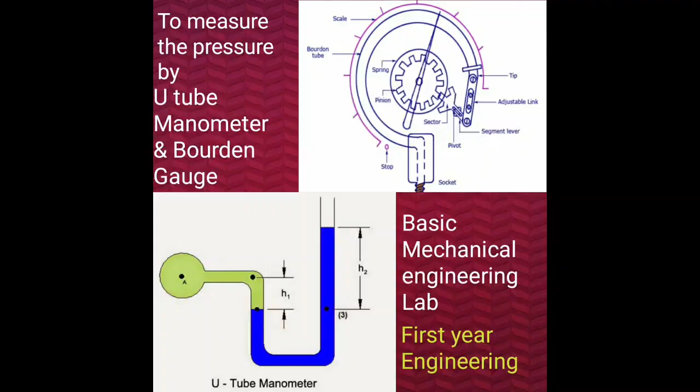In this session we are going to perform the experiment to measure the pressure by means of the U-tube manometer as well as the Bourdon tube pressure gauge. So, the aim of the experiment is to find out the pressure of water developing from a pump using a Bourdon tube pressure gauge and a differential manometer.

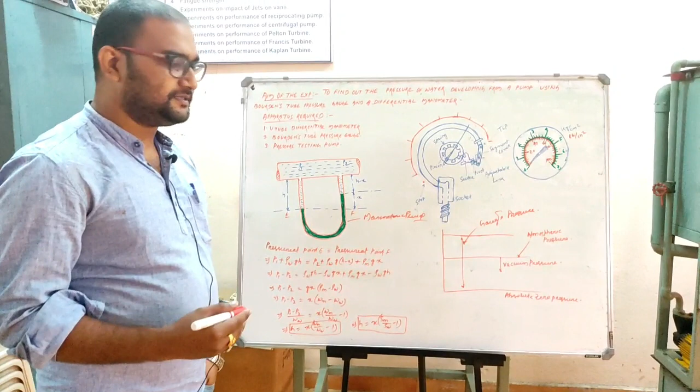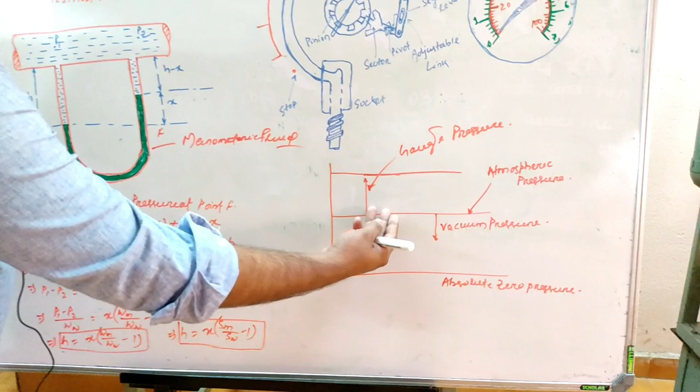Whenever we measure pressure, it is measured with respect to a certain reference point, and that reference point is absolute zero pressure. And when it is the atmospheric pressure, the pressure below the atmospheric pressure is the vacuum pressure, and all the pressure above the atmospheric pressure is known as the gauge pressure.

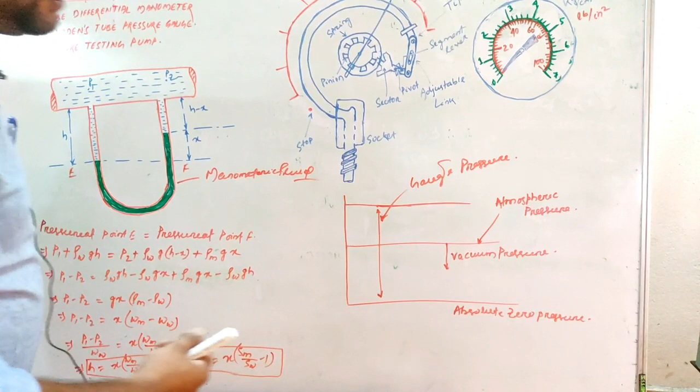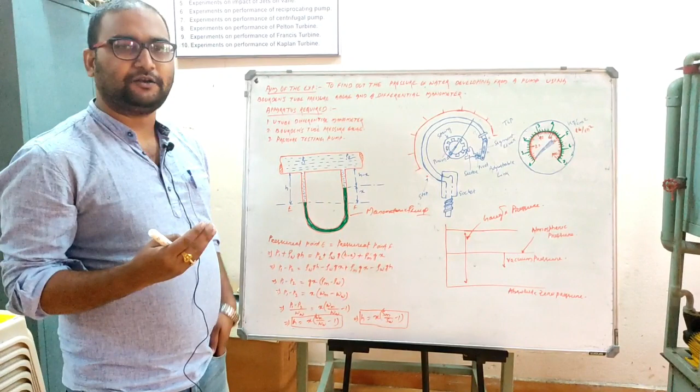Pressure measuring devices are mainly of two types: manometers and mechanical gauges. In manometers we find the U-tube manometer, the piezometer, the U-tube differential manometer, and so on. In mechanical gauges we mainly find Bourdon tube pressure gauges and diaphragm pressure gauges.

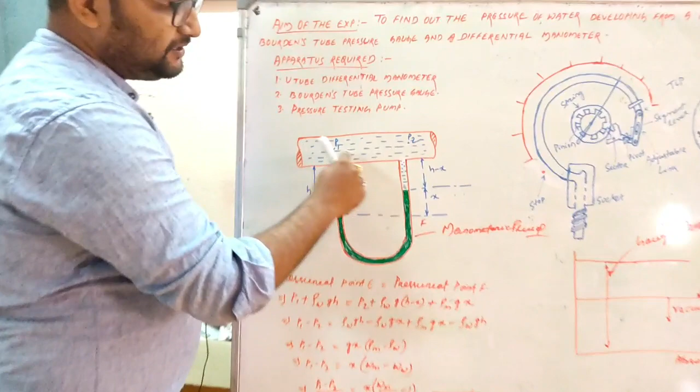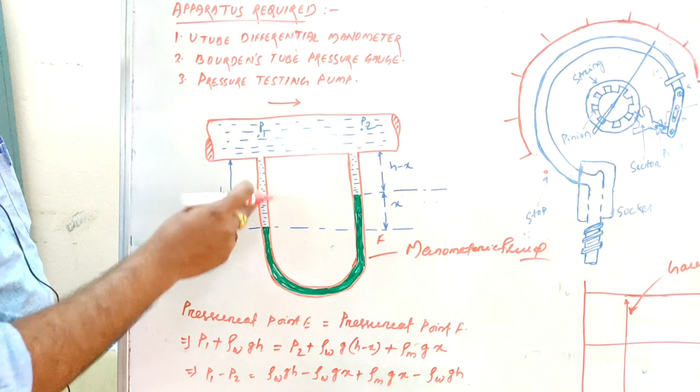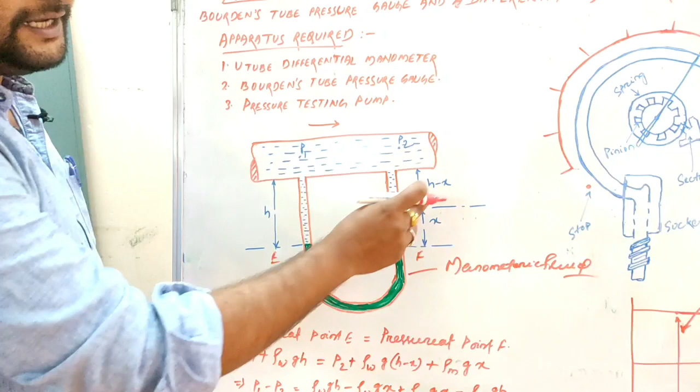In the U-tube manometer there is the main pipe for which we are measuring the pressure, in which the water is flowing from point P1 to point P2, and we measure the pressure difference between P1 and P2. The limbs of the U-tube manometer are connected, and inside is the manometric fluid. The height difference between the levels of manometric fluid is x, the head difference is h, and h minus x is the height between the measured point and the manometric fluid.

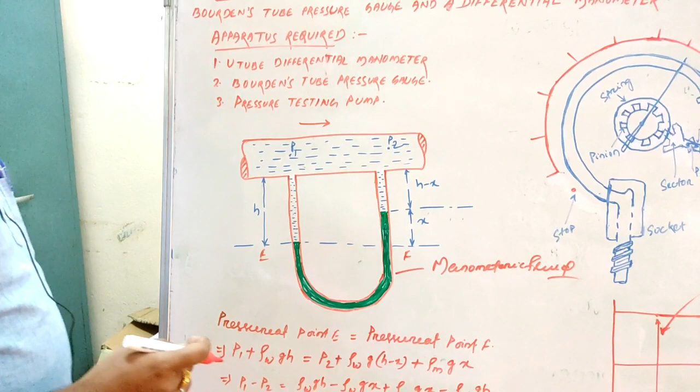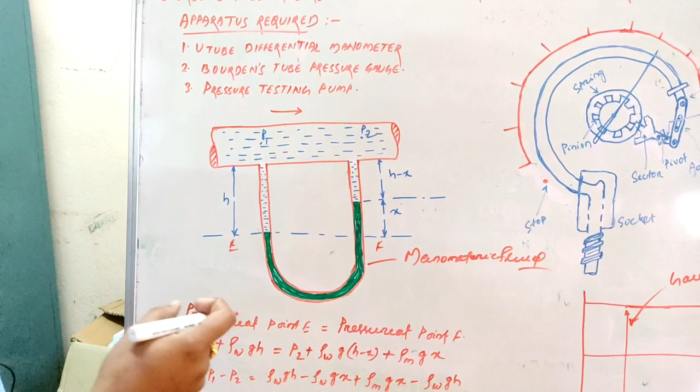For the manometer, the law of pressure measurement is the hydrostatic law of pressure. When the fluid is at rest, that means static condition, at any horizontal line the pressure is the same. Here the horizontal line is EF, so the pressure at point E equals the pressure at point F.

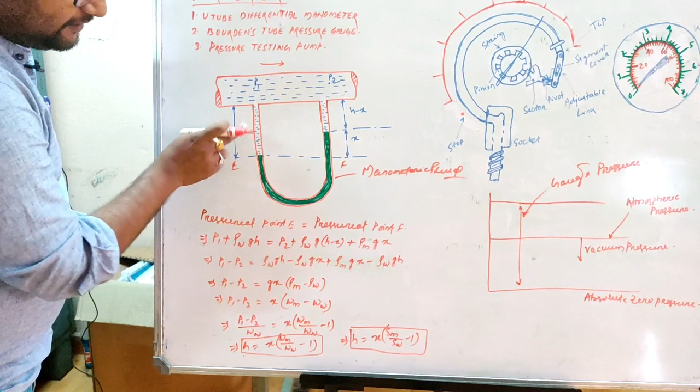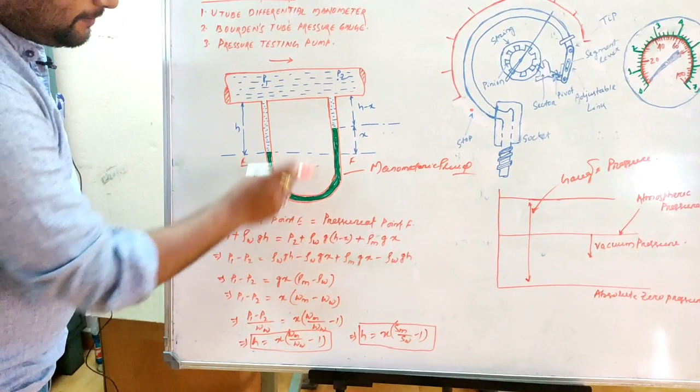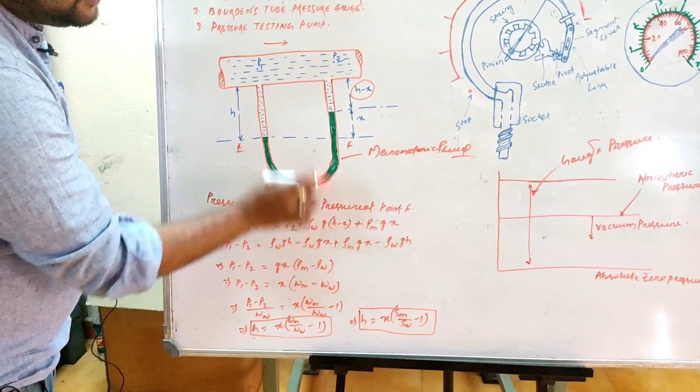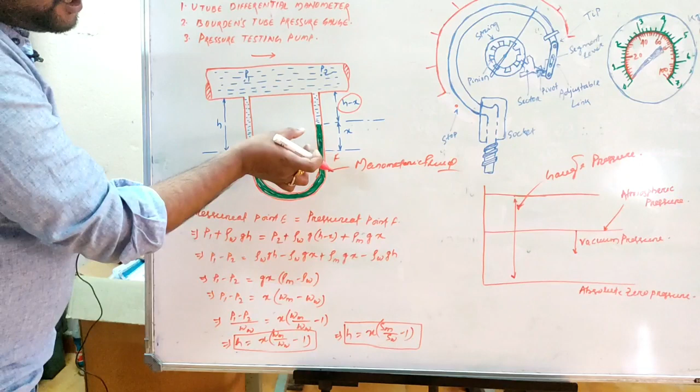Equating them, the pressure at point E is P1 plus rho of water into g into h, h being the height of the water inside the limb. This equals P2, the right side pressure, plus rho of water into g into (h minus x), because h minus x is the height here, plus the manometric fluid height. Let us consider the manometric fluid may be Hg. So here it is rho of m into g into x.

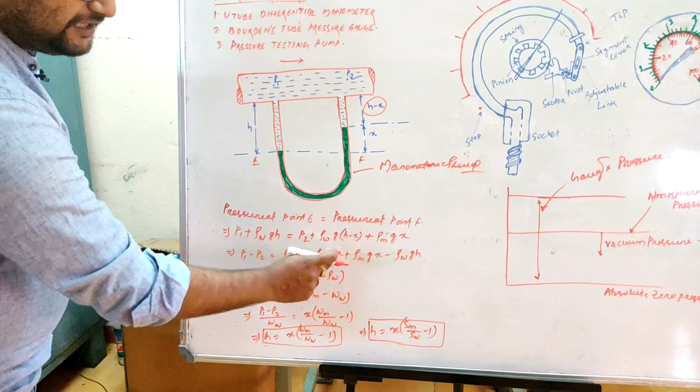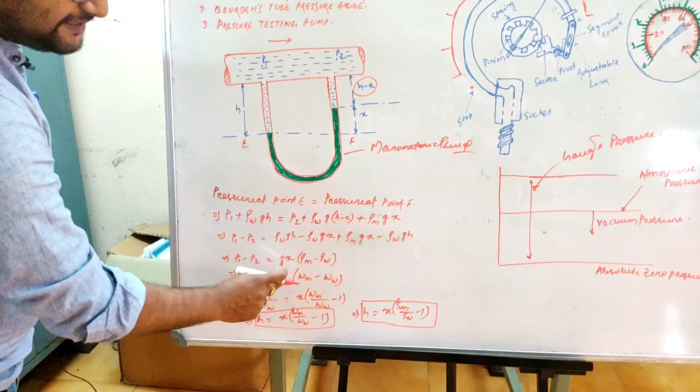We want the pressure difference between P1 and P2. So P1 minus P2 equals rho of water into gh minus rho of water into gx plus rho of m into gx minus rho of water into gh. So P1 minus P2 equals x into (Wm minus Ww).

Wm is the specific weight of the manometric fluid and Ww is the specific weight of the water. Dividing both sides by Ww, P1 minus P2 divided by the specific weight of water equals x into (specific weight of manometric fluid divided by specific weight of water minus 1).

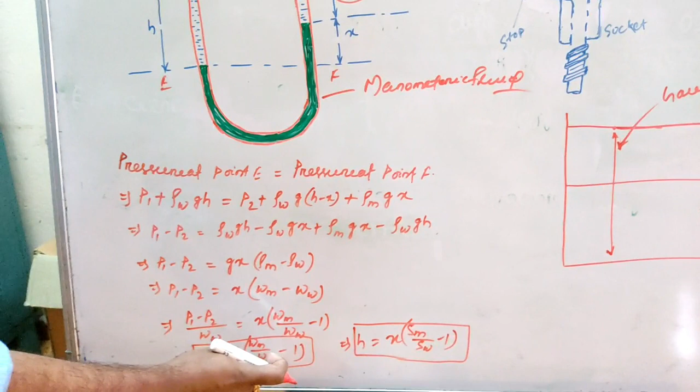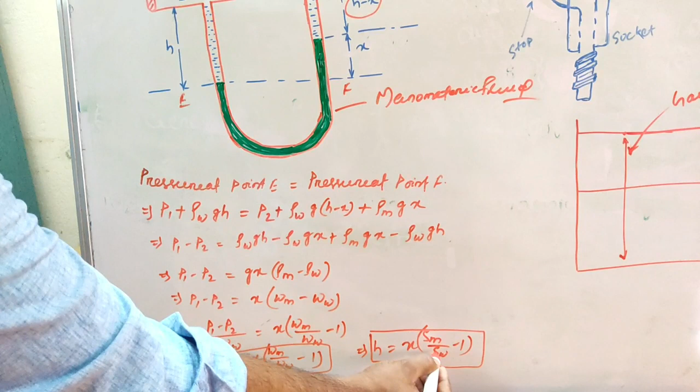This implies h, the water head, equals x into (specific weight of manometric fluid divided by specific weight of water minus 1). The ratio of specific weights is the same as the ratio of the specific gravity of the manometric fluid to the specific gravity of water. So I can write h = x(Sm/Sw - 1).

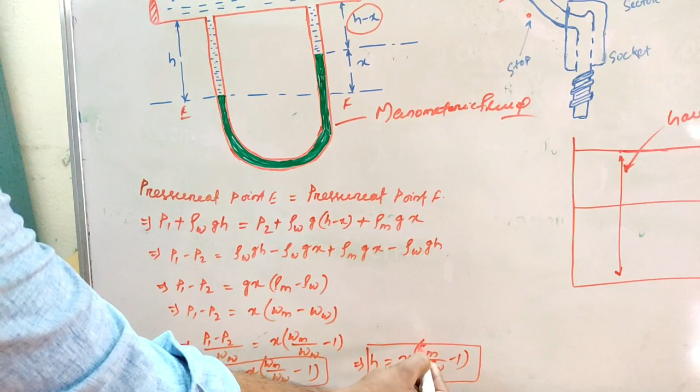If the manometric fluid is mercury (Hg), then Sm value will be equal to 13.6, and if the fluid is water, then Sw will be 1.

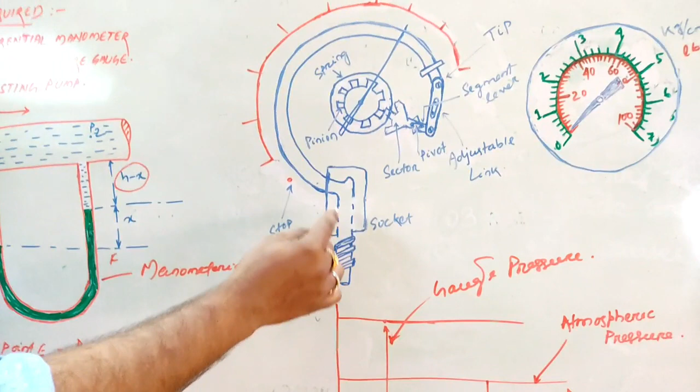Now moving to the Bourdon tube pressure gauge. Here we can see the socket, and the water is going to enter through this one, and here we can see the curved tube is attached here.

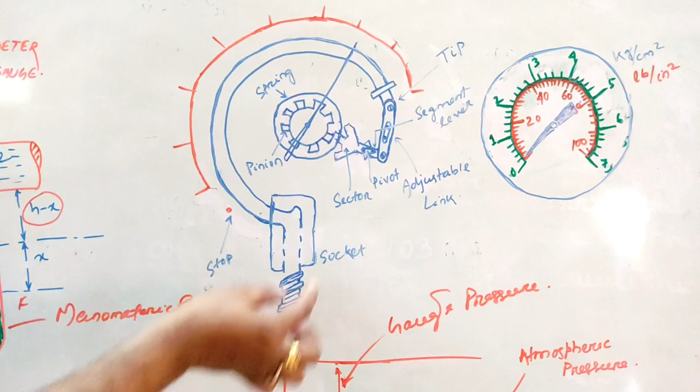When the water flows through this curved tube, one end is fixed to the socket and the other end is to the tip, which is enclosed at the tip point. The tip is attached to the segmental lever and the adjustable link. This one is the adjustable link and this one is the segmental lever, and the segmental lever is attached to the pivot sector, and then to the pinion. When the pinion rotates, the spring action happens, meaning the spring force generates.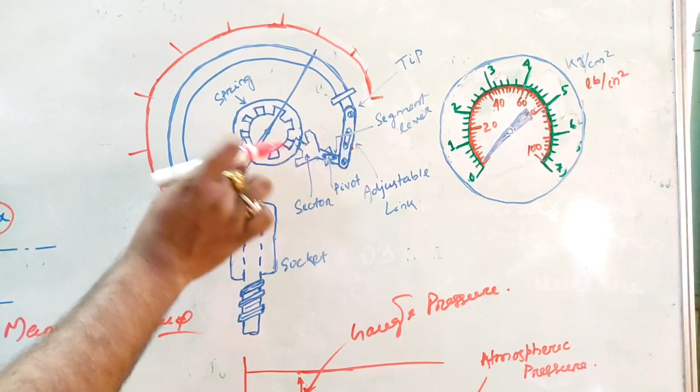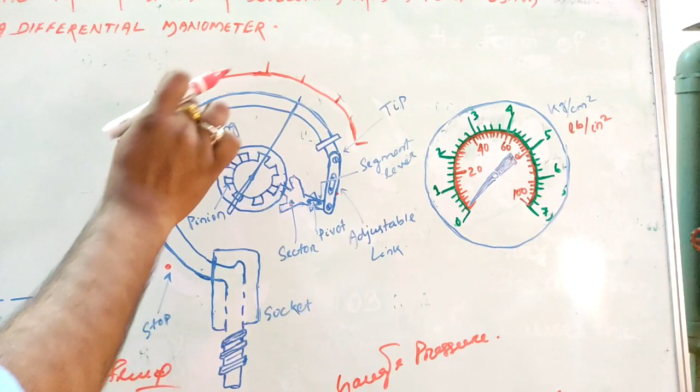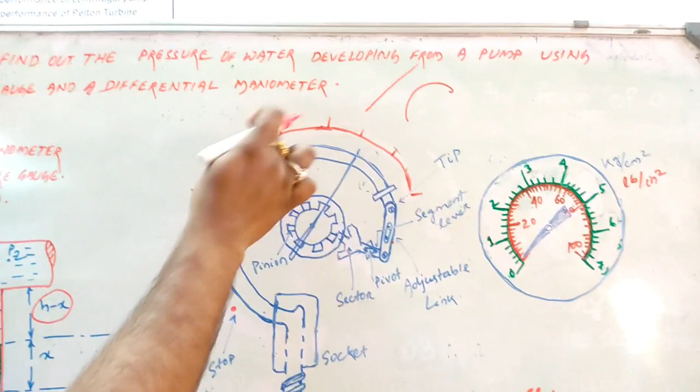Now what will happen when the water enters this tube: the curvature reduces. Initially it was in a curved section. When the water enters, it will go towards a straightened condition, meaning the curvature will decrease.

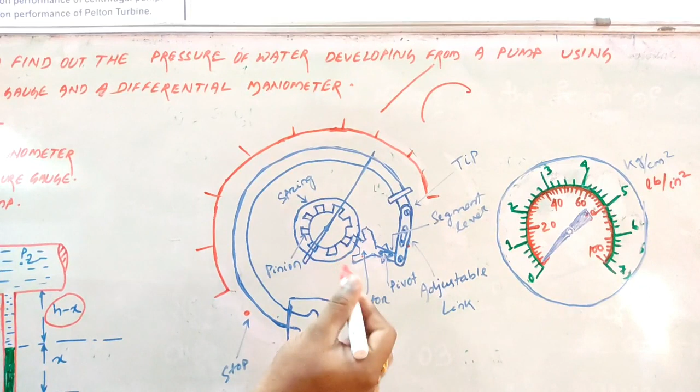When the curvature decreases, the segment lever will operate, meaning the sector will have motion. The sector is connected to the pinion, so the pinion will rotate, and the pinion rotating means the spring force will be generated.

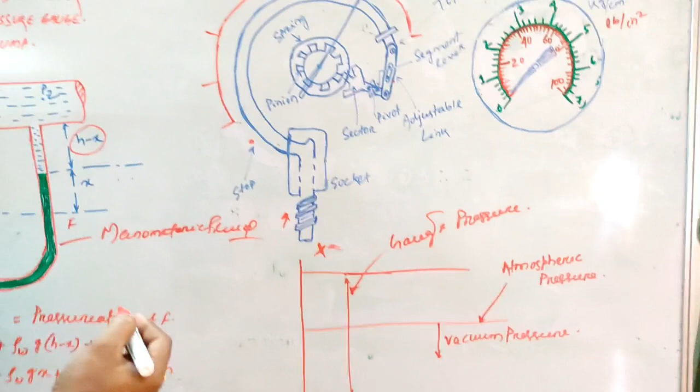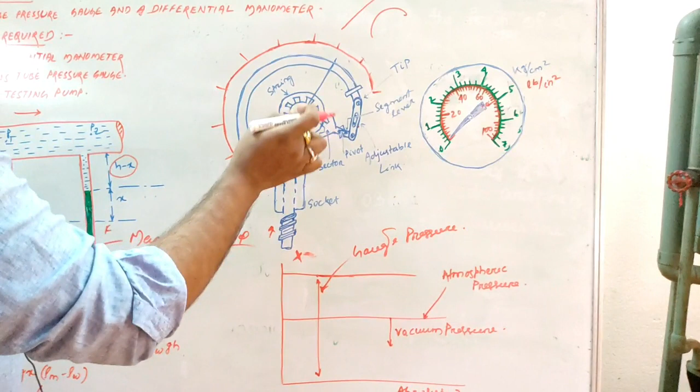Suppose the water flow is blocked, or you release the water flow. Initially it was flowing, and now you will release the water flow. When you release the water flow, the curvature will increase, meaning it will operate in the reverse direction. Reverse direction operation means the spring force will be released, and the pointer will go back to the initial condition.

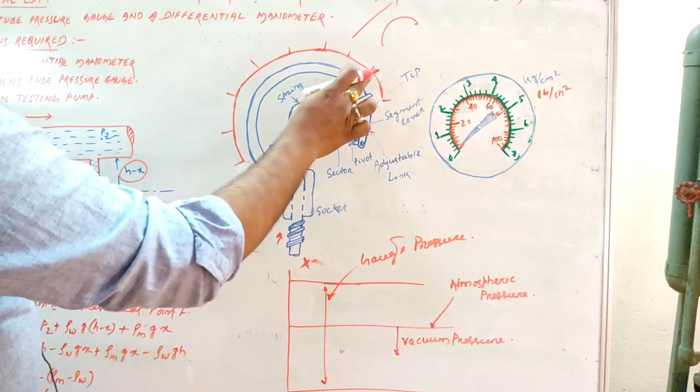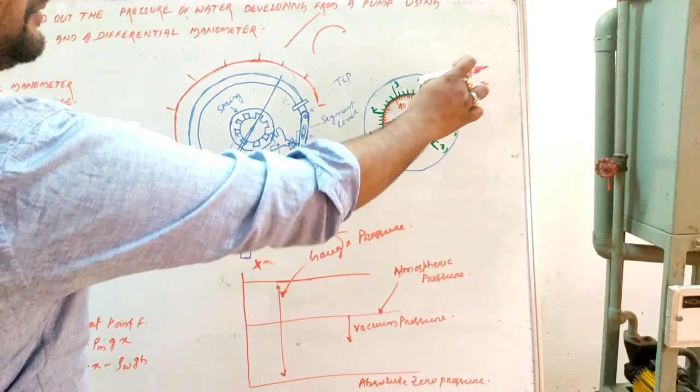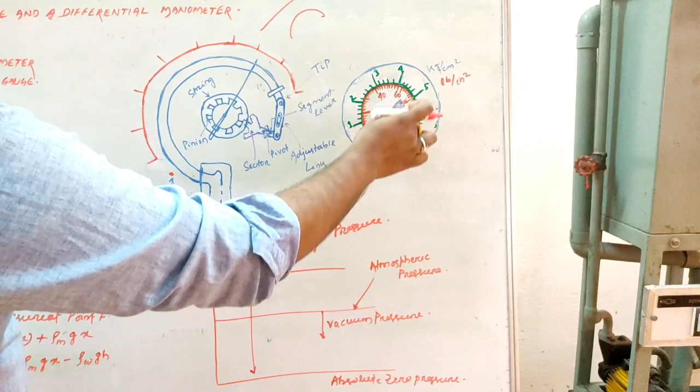The initial condition is the stop condition, marked by the graduation used to measure pressure. In the experiment we will see the graduation measuring pressure in kg per centimeter square as well as pound per inch square. The green marks show the graduations in kg per centimeter square, and all the red marks show the pound per inch square.

Now next we will move to the test rig part. Here is the test rig for the experiment, and here we can see the pressure is going to be measured in the U-tube manometer as well as the Bourdon tube pressure gauge. We are going to find out the pressure in the U-tube manometer as well as the Bourdon tube, and compare both the pressure measurements here.

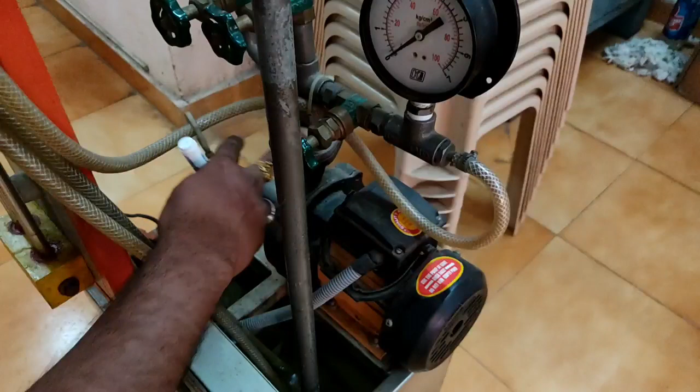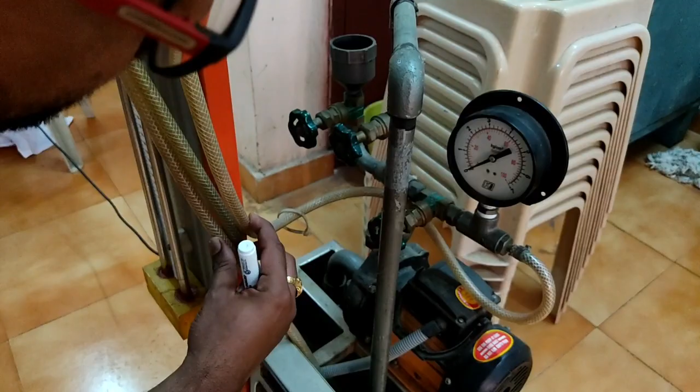Now you can see this one is the sump, and this is the pump attached here, with the suction pipe and the delivery pipe. In the delivery pipe, we can see the pressure is measured at this point by means of the Bourdon tube pressure gauge as well as the U-tube manometer. In the U-tube manometer, the pressure is measured in terms of head of water, with graduations in centimeters, which we will convert into meters.

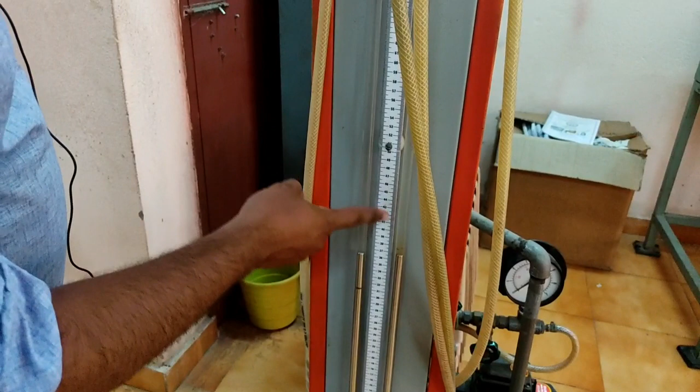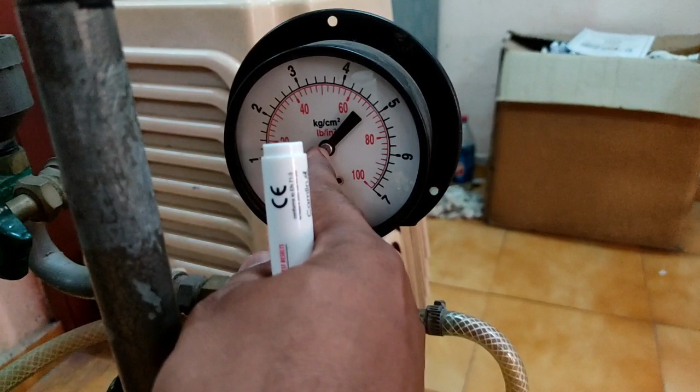Here we can see in the Bourdon tube pressure gauge, the graduation is in kg per centimeter square as well as pound per inch square. So we are going to convert this kg per centimeter square into meter of water, since 1 kg per centimeter square is equal to 10 meters of water as pressure.

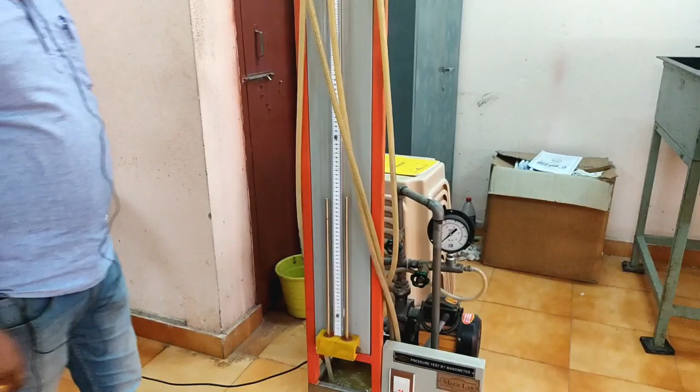Now when we operate this, we will open the delivery pipe, that means the delivery valve, so the pressure is going to increase.

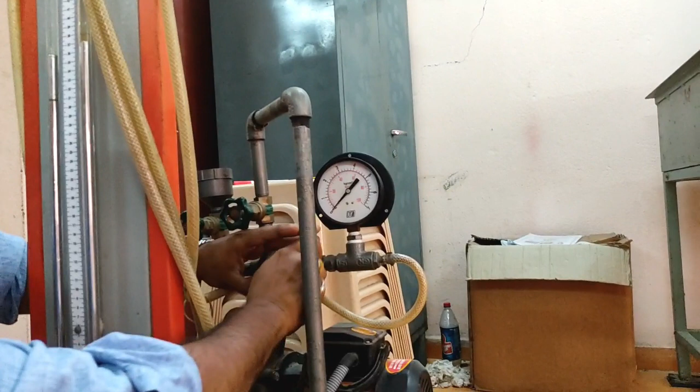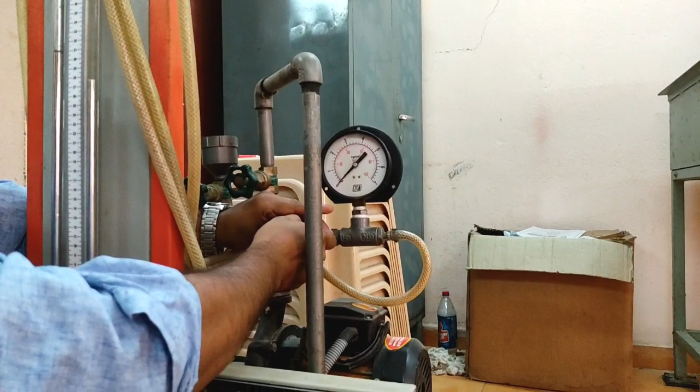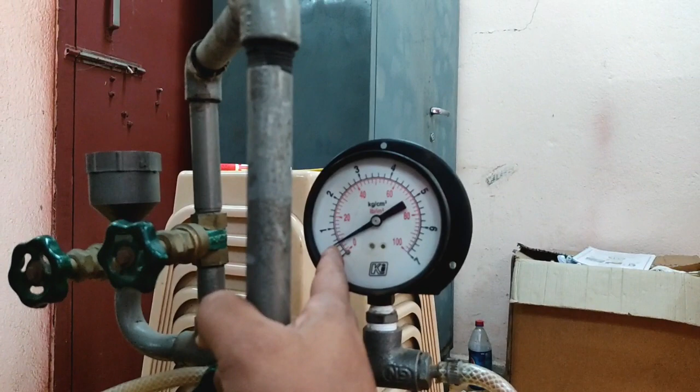So we will see in case of the Bourdon tube, as here we can see in the Bourdon tube pressure gauge, the pointer is at 2 divisions of the black mark. The black graduation shows that the least count is 0.2 kg per centimeter square, so 2 divisions means 0.4 kg per centimeter square.

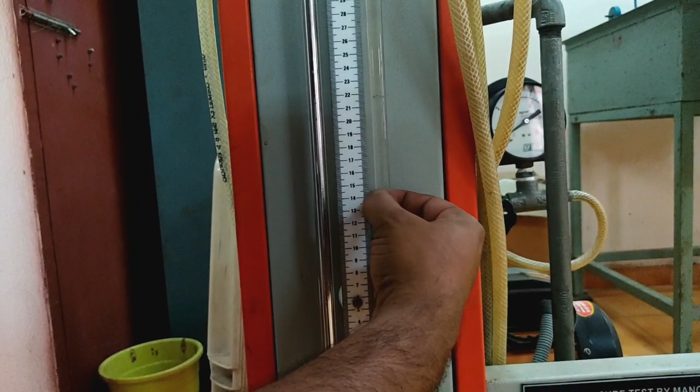In this case of the U-tube manometer, we see the meniscus on the right side of the manometric fluid is at 14 centimeters and the left side is at 59 centimeters. So the pressure equals 59 centimeters minus 14 centimeters.

So likewise we will take different values of pressure measurement by operating this valve, and write them in the table. This U-tube manometer is connected to the continuous delivery pipe, meaning the water flows through this hose pipe and again enters the sump, so it is measuring the gauge pressure actually.

Suppose one end is fitted and the other end is open. Suppose this U-tube manometer has one end attached to the pipe and the other end open, then it will measure the pressure. When both tubes are attached, it measures differential pressure. When one end is open to the atmosphere, it measures gauge pressure.

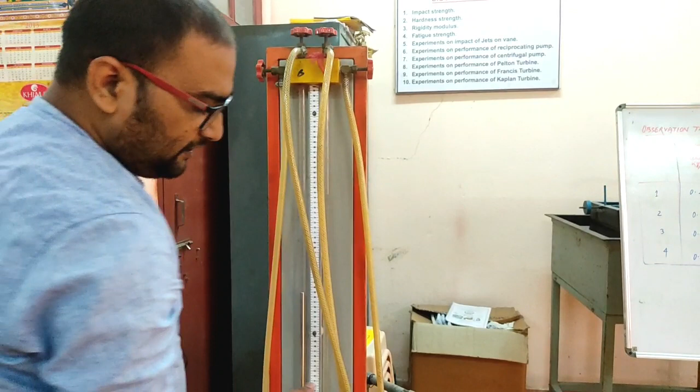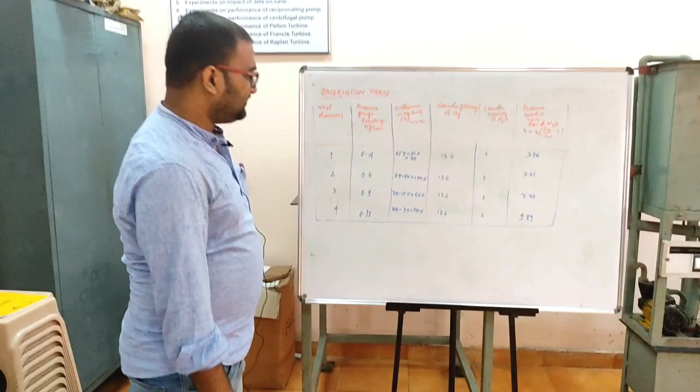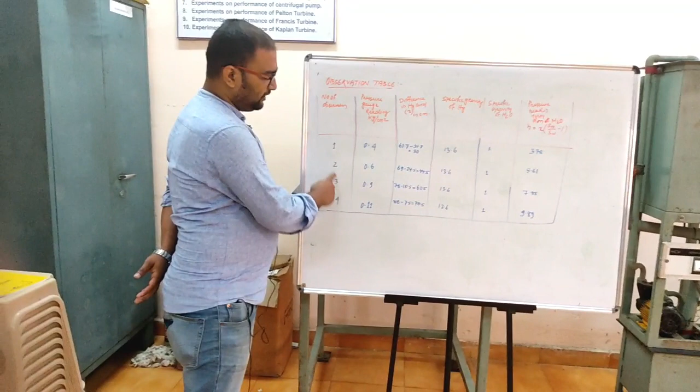Now we will move to the observation table and see different values of pressure measurement at different operations of valves. These are the data collected during the various valve operations of the test rig, and this is the observation, serial number 1, 2, 3, 4, along with pressure gauge readings in case of the Bourdon tube pressure gauge.

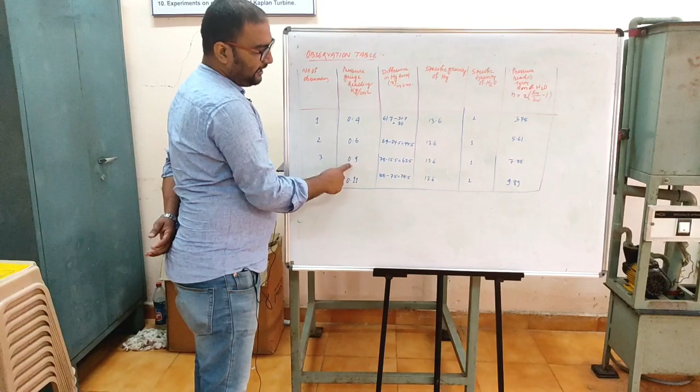So this one is 0.4 kg per centimeter square, 0.6 kg per centimeter square, 0.9 kg per centimeter square, as well as 0.11 kg per centimeter square.

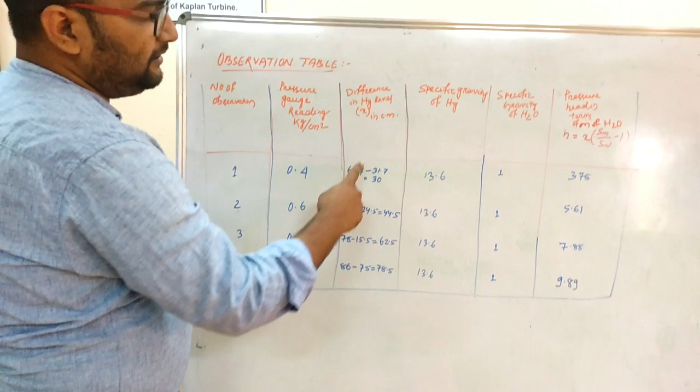And here this is the difference in mercury level, that is 61.7 minus 31.7 equals 30 centimeters. So all these are in centimeters: 44.5 centimeters, 62.5 centimeters, and 78.5 centimeters.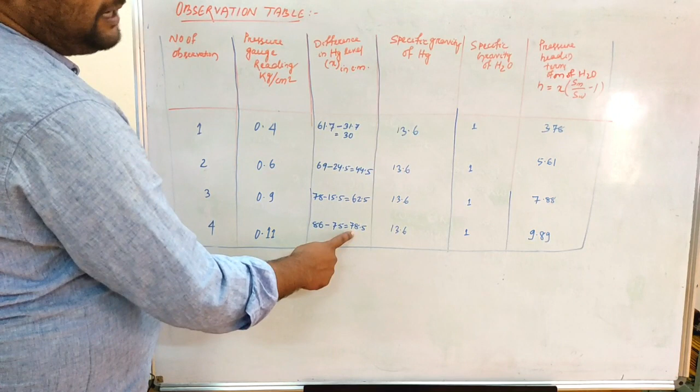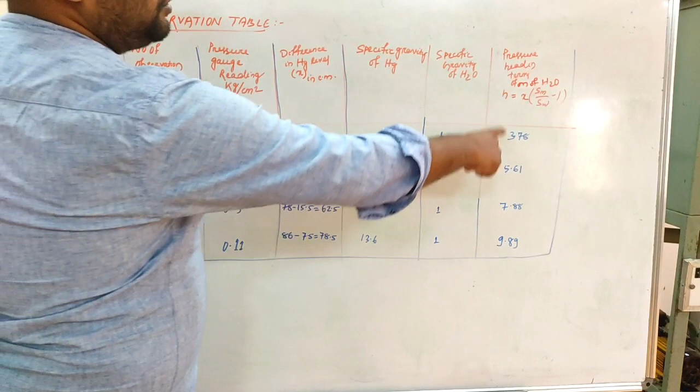And the specific gravity of Hg, that is mercury, is 13.6, while the specific gravity of H2O is 1. So putting the formula to find the pressure head in terms of meter of water, that will equal x into Sm by Sw minus 1, which equals 3.78.

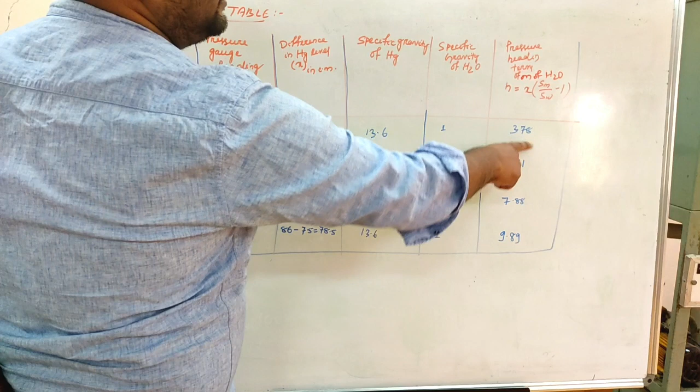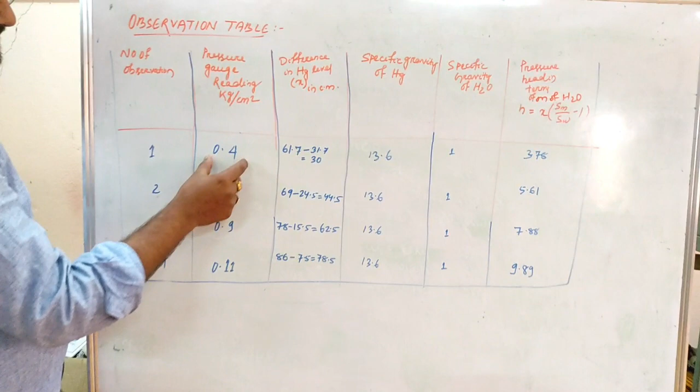So this one is 5.61, 7.88, and this one is 9.89. Now whenever we compare these readings, that means 0.4 with 3.78, it means that 0.4 kg per centimeter square equals 4 meters of water.

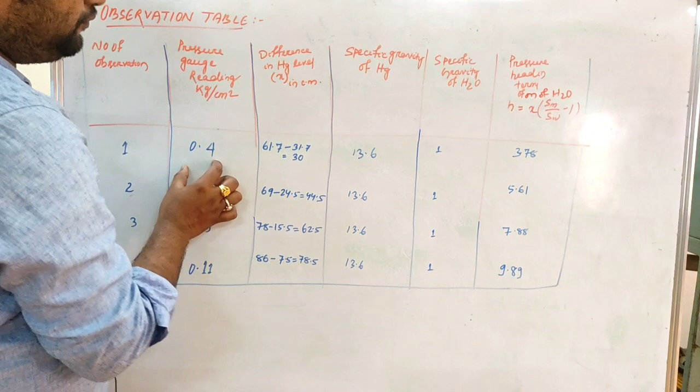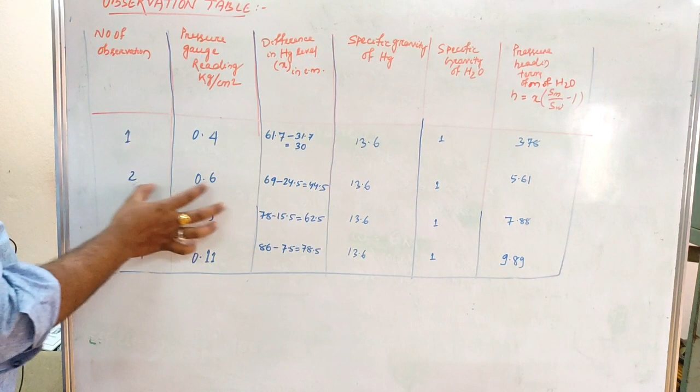So 4 meters of water in terms of the Bourdon tube pressure gauge, and in terms of the U-tube manometer it is 3.78 meters. And in terms of the Bourdon tube pressure gauge, for the second observation, that equals 6 meters of water, and here it is 5.61 meters of water in terms of the U-tube manometer.

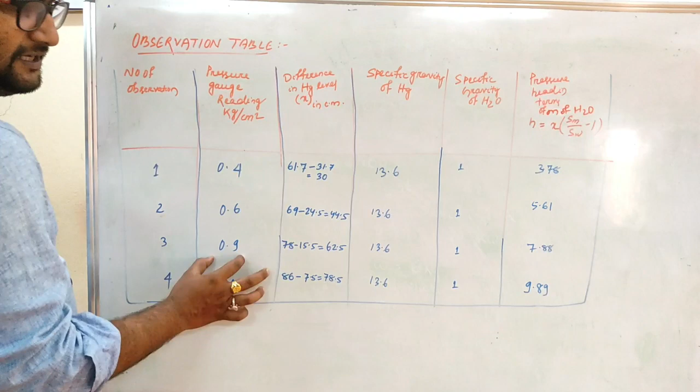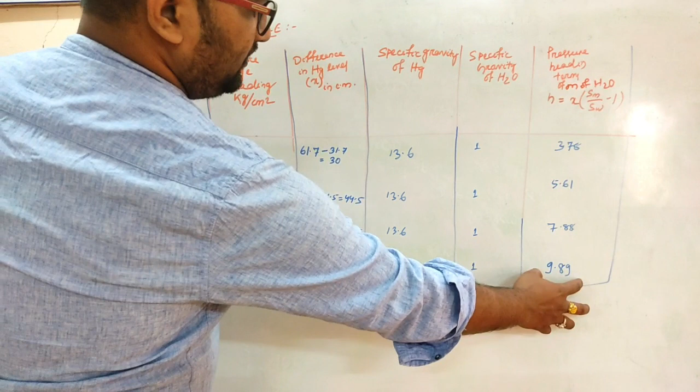So likewise this one is 9, this one is 7.88, this one is 11 actually, and this one is 9.89 actually. So what happens is, when we compare both values they may not be the same, but they are going to be nearly equal.

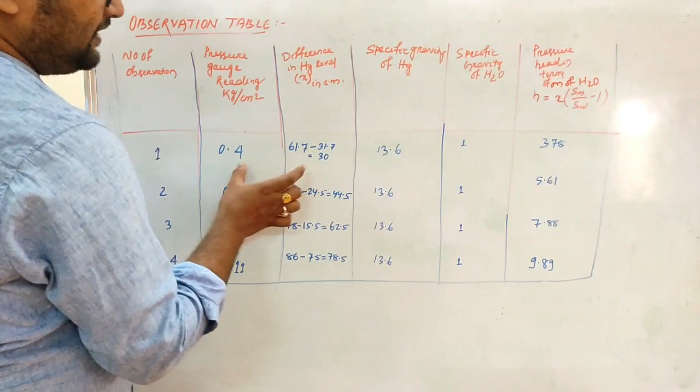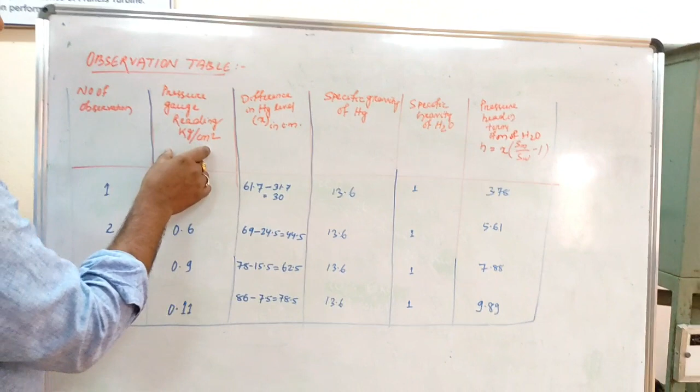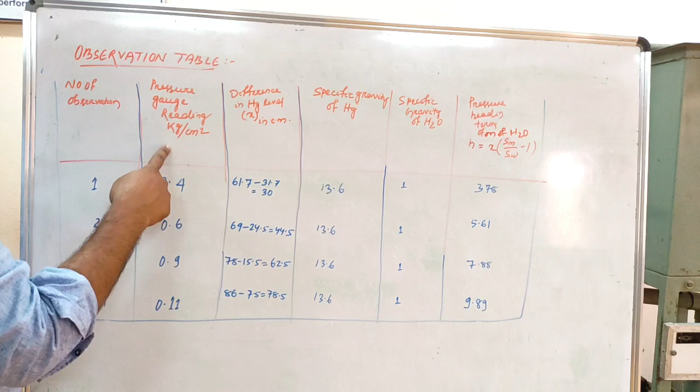So why nearly equal? Comparing the least counts, the least count of the Bourdon tube pressure gauge with respect to the least count of the U-tube manometer is different. Why different? Because the least count is 0.2 kg per centimeter square here, and here the least count is 1 millimeter actually. So that is one factor.

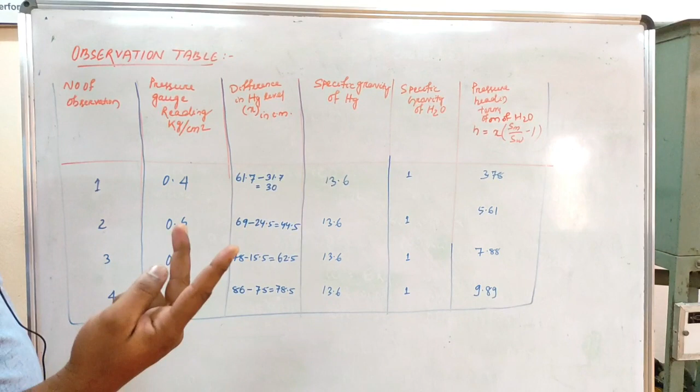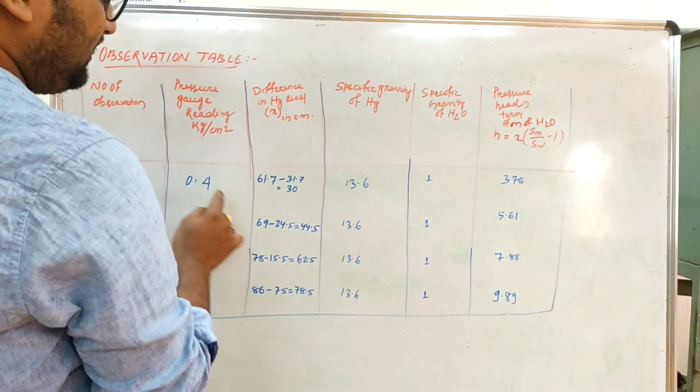Other factors include the losses in the fluid, the energy losses due to fluid motion. So lots of factors contribute to why they are not exactly the same, but they come out nearly equal, meaning 4 meters of water here and 3.78 meters of water there.

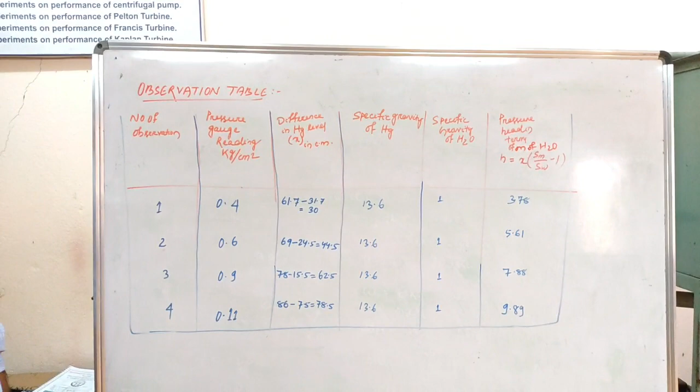So this is all about the experiment to find out the pressure by means of the Bourdon tube pressure gauge as well as the U-tube manometer. This is all about this session. Thank you very much.